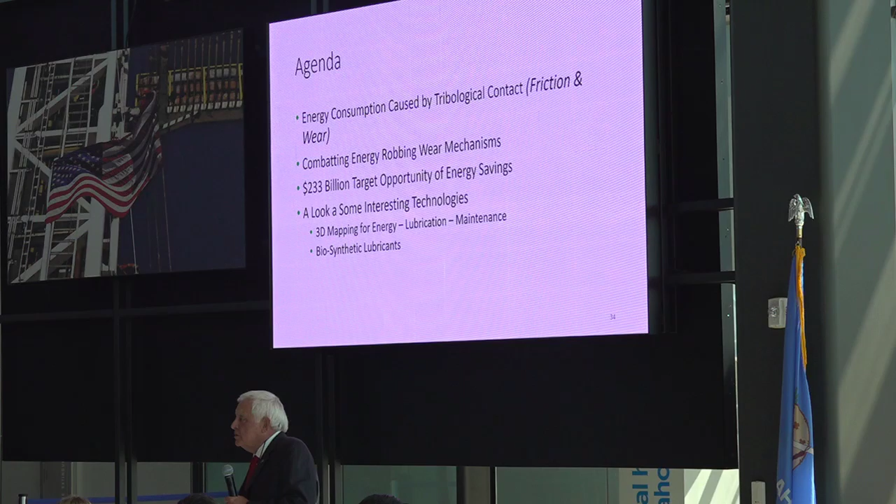The agenda: energy consumption caused by tribological contacts—that's the nerdy way of saying we've got a lot of friction and wear out there. We'll be looking at combating energy-robbing wear mechanisms with a very simplistic approach since it's only about 20 minutes. Then I'm going to talk about a $233 billion target of opportunity for energy savings—maybe one of the reasons why we're here. Then I'm going to talk about some interesting technologies that are coming around, including 3D mapping of facilities for energy audits, lubrication and maintenance programs, and maybe some biosynthetic fluids replacing petroleum products with synthetic bio-based fuels.

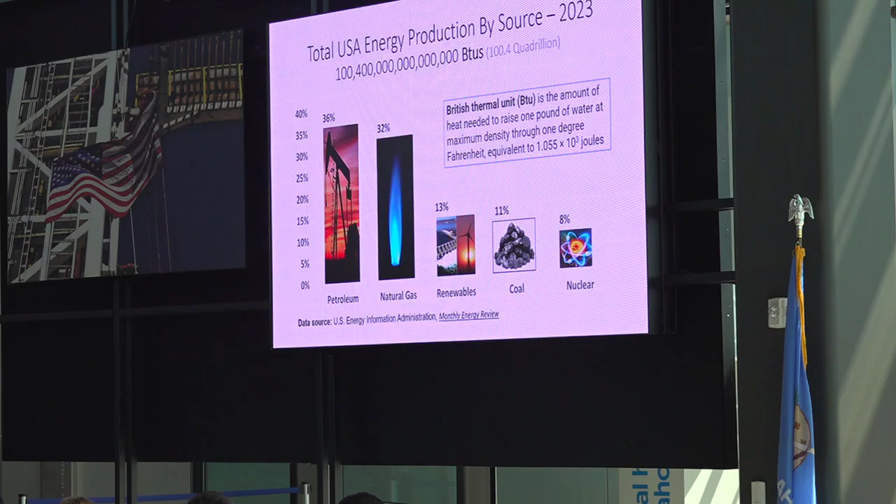So last year we produced 100.4 quadrillion BTUs of energy in the United States—almost 20% of the world's energy. When I've traveled internationally, people always say, well, you're an American and you guys use up so much electricity and energy. But I also say, yes, I'm American, and we probably develop 50% of the patents worldwide. If we're going to develop 50% of the patents worldwide, we need to be using our energy more responsibly and show other people how to do the same thing.

So we get about 36% from petroleum, 32% from natural gas—that's not going to go away for a long time. About 13% renewables, 11% coal, and probably a really black mark on this country is we're only producing about 8% with nuclear. The Three Mile Island movie is probably to blame for that.

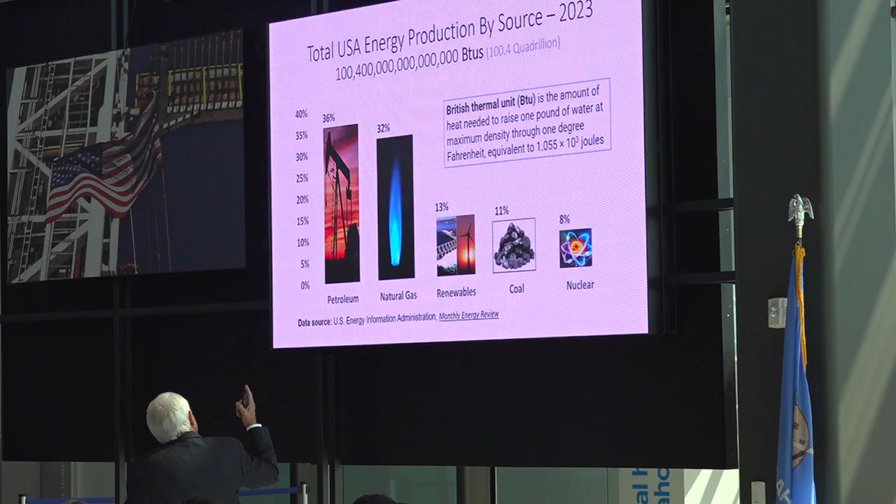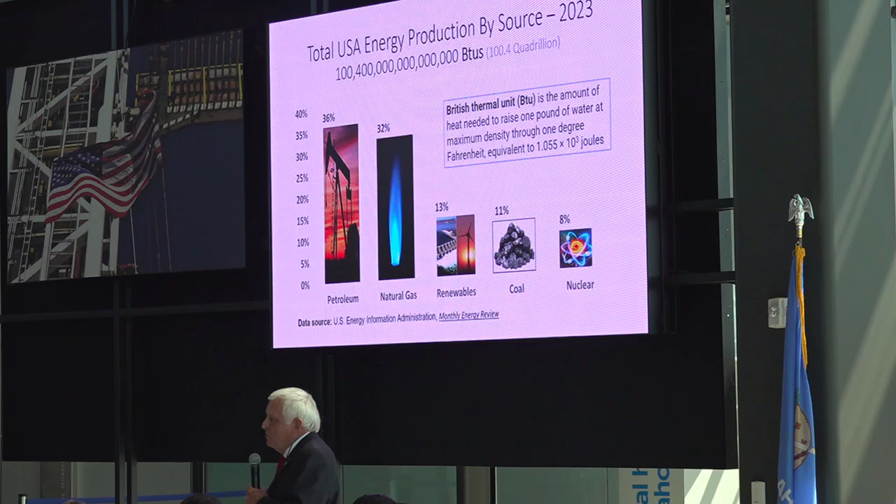If anyone knows what a British thermal unit is, it's the amount of energy to increase 1 pound of water by 1 degree Fahrenheit. If we took all of the energy we produced last year and used it to heat the Great Lakes, we could raise it 1.5 degrees Fahrenheit. So that's a lot of energy. A lot of energy.

So for transportation, about 1% comes from nuclear—that would be the nuclear aircraft carriers and submarines in our naval forces. About 5% from renewables, 4% from natural gas, and 90% from petroleum. That's a big number that we have to deal with.

If we want to replace that by 2030, it's going to be a big pull.

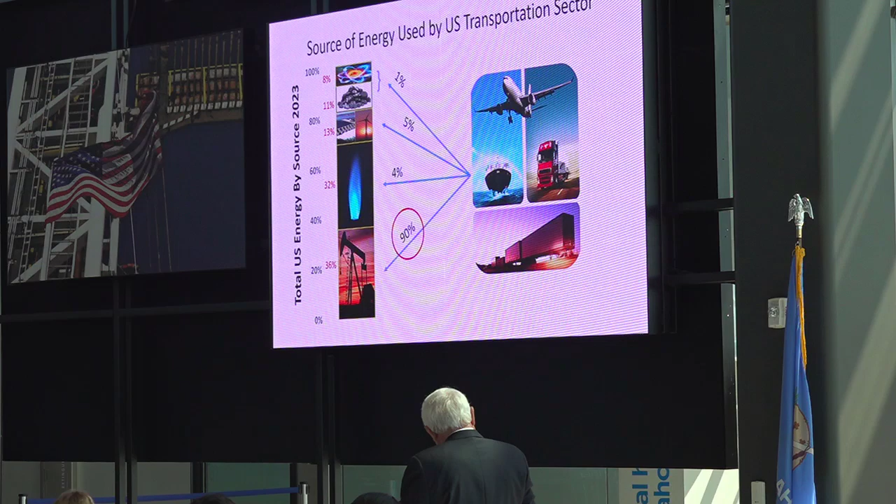Sources used by industry, which is what we're going to be focusing on: we're getting about 4% from coal and nuke, about 9% from renewables, 40% from gas, 34% from petroleum, and 13% from electricity. And that really surprised me.

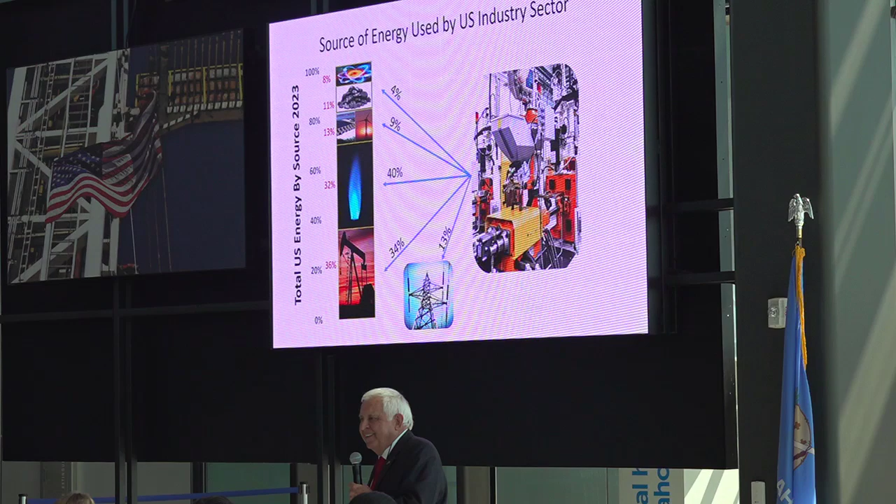That industry only uses about 13% of electricity, but when you realize all of the thermal energy that's required to make steel, okay, to use heat transfer systems for liquid blending and things like that, then it really starts to

make sense. So these are big numbers, but we really need to understand to get our hands around the problem. If you don't know how big the problem is, it's kind of hard to solve it.

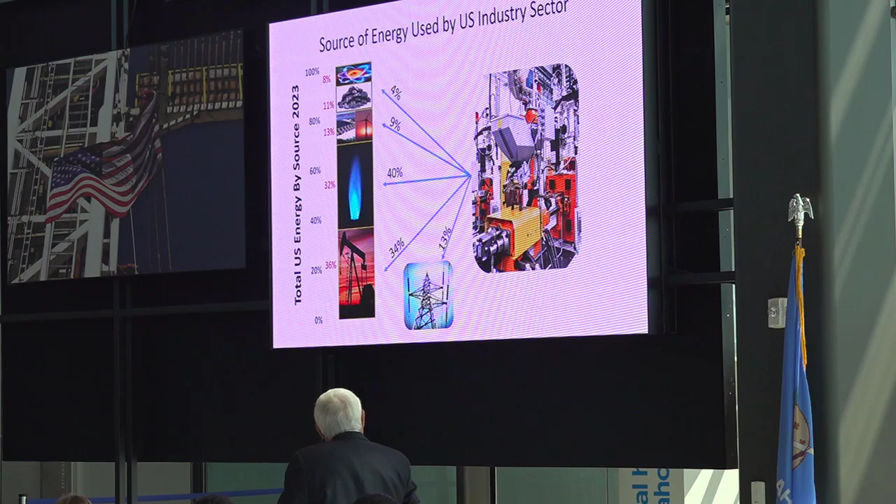Now we take a look at electricity, which we all want to save. We produced 36.7 quads BTU of electrical power last year, but only 12.9 quads got to the end user. We lost 65% in transmission.

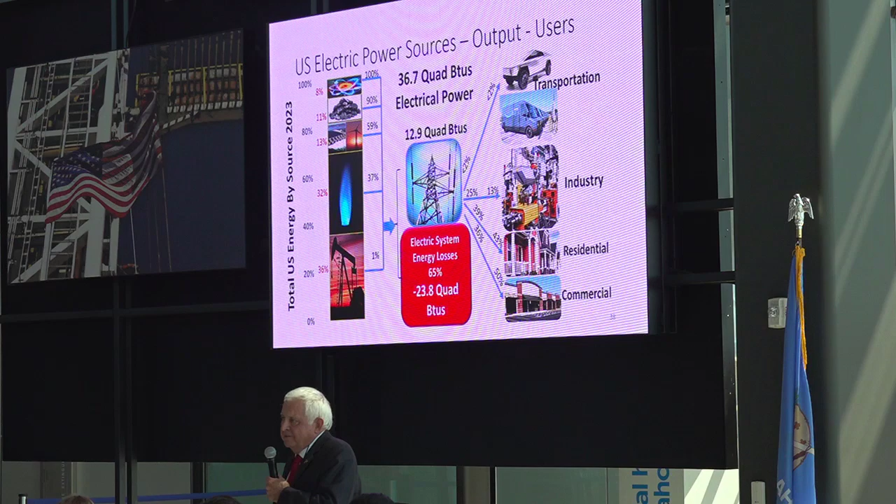Now, most people think that electricity flows down the wire like water does a hose. No, that's not the way it goes. It's the excitation of electrons from one to the other, and as that distance goes, that excitation reduces, and so you lose power.

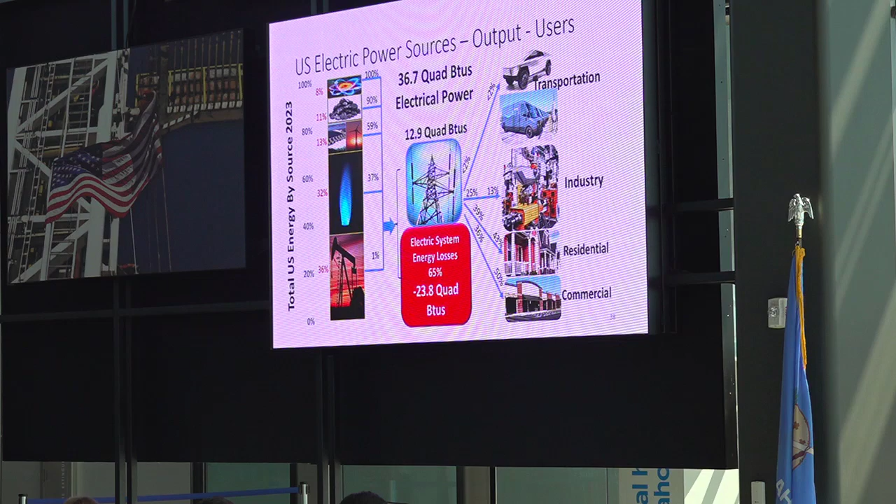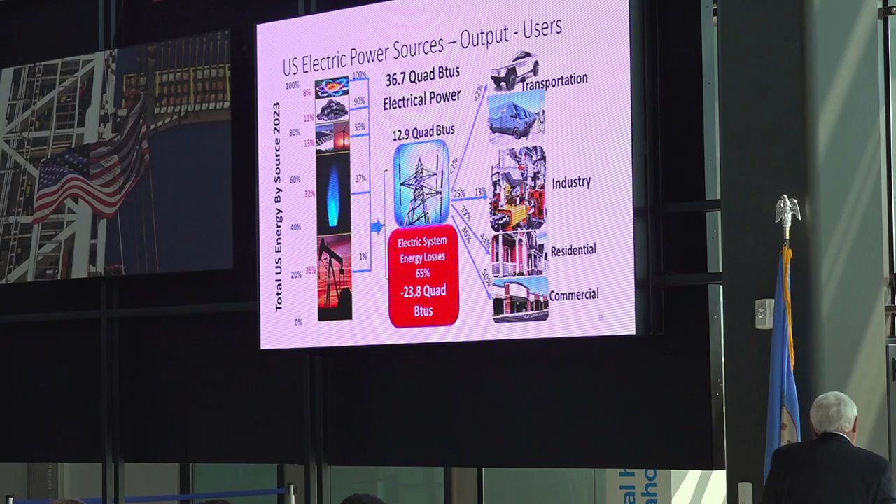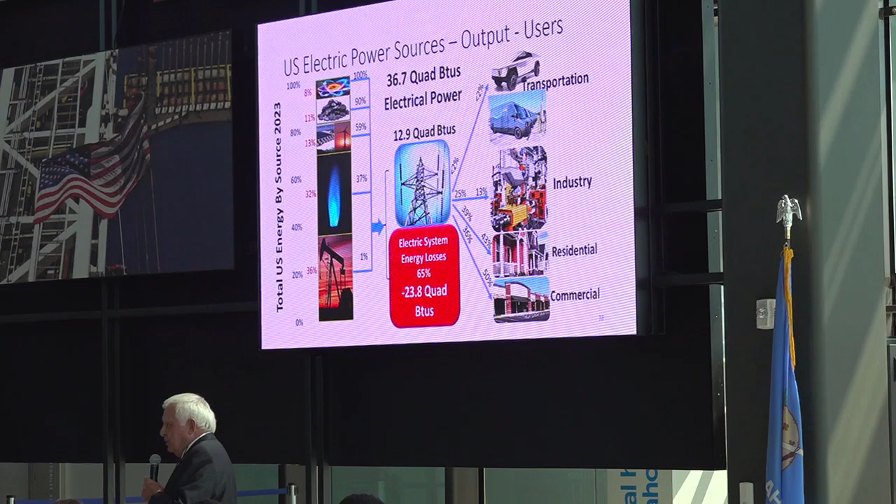If you're not a physicist, you know that that's pretty cold. That's equivalent to minus 220 degrees Fahrenheit. It might be really good for manufacturing on the far side of the moon, but not here. Not here. We still have a ways to go.

So where are we going to be using electricity? How much electricity is AI going to require? About 114 trillion watts.

Okay, so if we can't send it long distances, I think what we're going to have to do is the AI people, they're going to have what we call microgrids. They're going to have to establish their own microgrid, maybe a small new power plant, in order to provide the electrical energy needed for AI, because we certainly can't support it right now.

So we look around and say, what's this guy talking about? Microgrids and small nuclear power plants, isn't that stuff dangerous? Well, if we took all of the high-level nuclear waste, it wouldn't even fill this auditorium up to the first window. But it's really bad stuff.

Looking at a microscopic level, probably the next Nobel Prize in physics is going to be given to someone who's working on the transmutation of nuclear waste, turning it into isotopes that have a half-life not of 250,000 years or 5 million years, but maybe 50 years, so that we can actually handle it as a civilization.

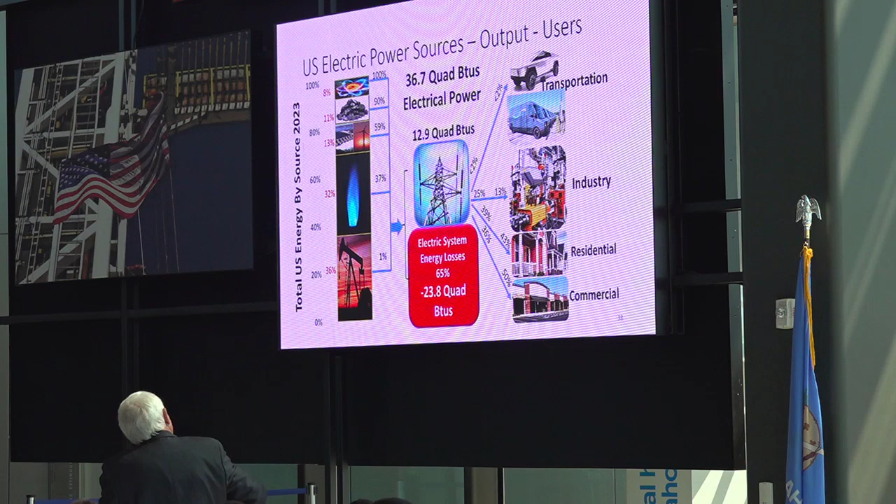So we take a look at how electricity is used: only about 2% now in transportation, 13%, 25% going to industry, 39% going to residential, and 36% going to commercial.

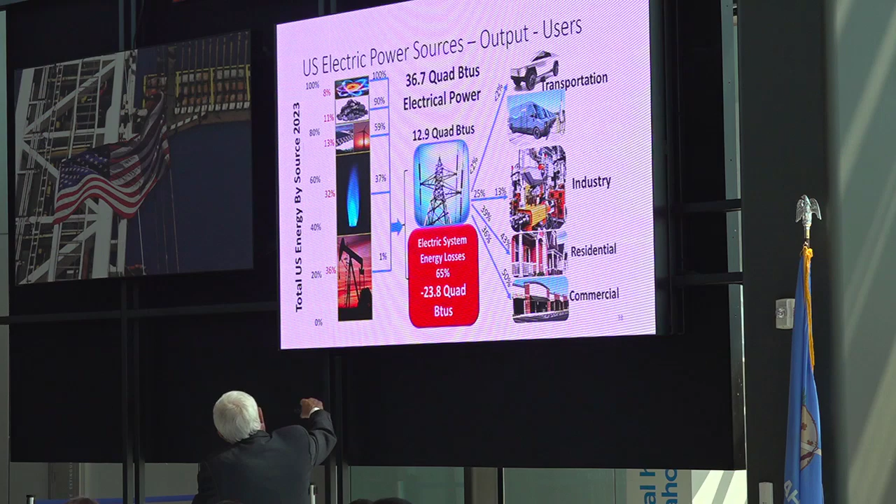And of course, this leads us to retrofitting buildings and things like that to save energy. But even if we could save that by 50%, we'd still only be saving maybe 5 or 6 quads of electricity.

This is a huge number. The world energy consumption caused by friction is more than what the United States produced last year.

I want to say it again: world energy consumption caused by friction was more than the energy that the United States produced last year — 101.3 quads.

So you know where this is going. I want to reduce friction, because this really could be low-hanging fruit.

So what is this friction and wear? Who's the tribologist in here? Yeah, I brought my own tribologist so he could raise his hand. Who's in physics? Chemistry? Okay, little lesson.

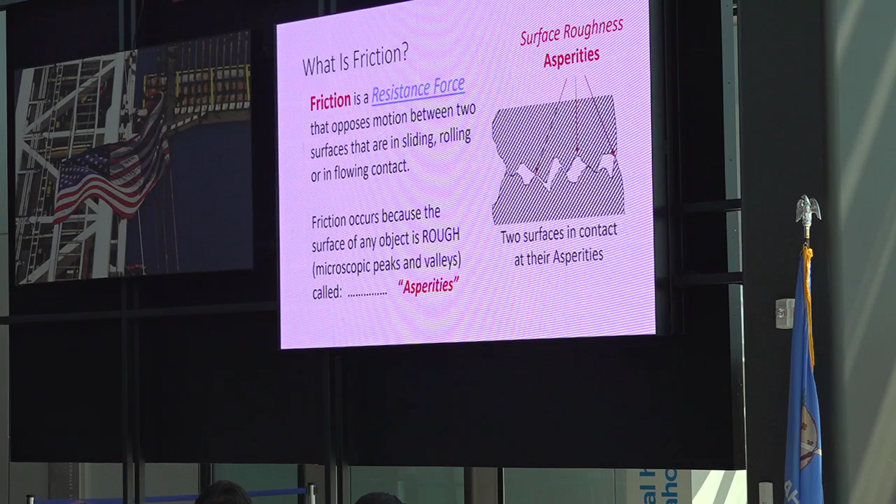Even under magnification, if I take a look at a very shiny ball bearing and I magnify it enough, I can see that that surface, although it reflects light, what shiny does is extremely rough. This is small enough where you can actually see the carbon in the carbon steel matrix there.

65% of equipment failure is attributed to wear. We're talking about people, profit, planet. If we can reduce wear, that seems to really improve their profitability. Things won't wear out as quickly. Things will last longer.

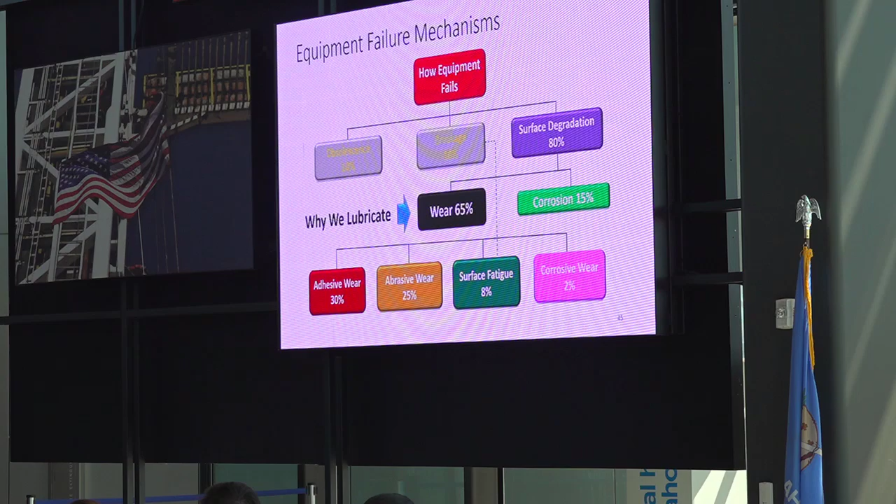So how does equipment fail? About 10% is obsolescence. So if you're the owner of a coal-fired power plant, your equipment is failed by obsolescence, as you have a dirty source of energy. Then there's breakage. Who hasn't broken glass? To me, breakage, I immediately think of a forklift driver, right, Penny? In manufacturing plants, they break everything.

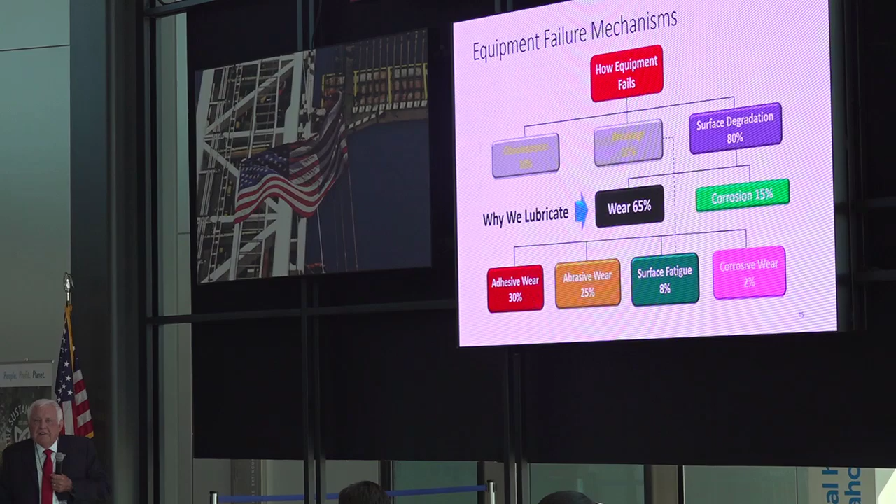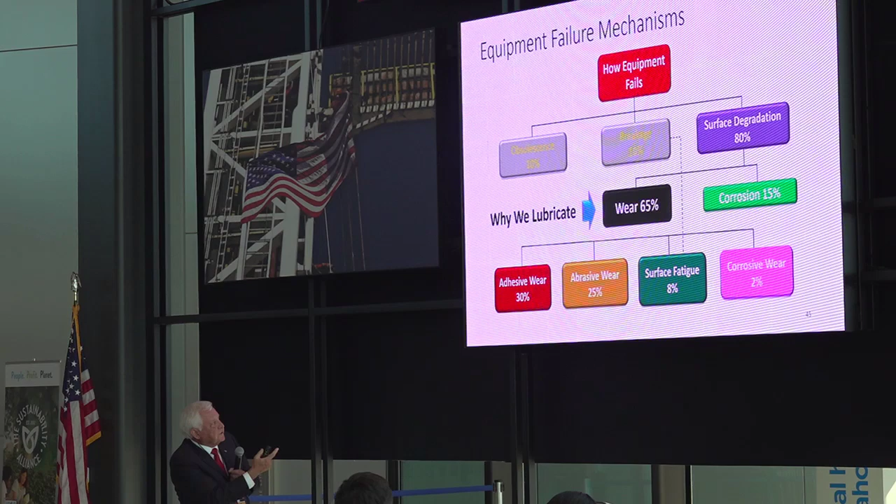They beep just before they break something. Okay, and then 80% of surface degradation, 15% of that is called corrosion. That's why we paint and use correct protective coatings. And 65% is wear related: 30% adhesive wear, 25% abrasive wear, 8% surface fatigue, 2% corrosive wear.

All of these wear types, there's only 4, but we call them by a lot of different names. This is what happens with adhesive wear: typically we just have 2 metal surfaces coming in contact at the asperities because we've used the wrong lubricant.

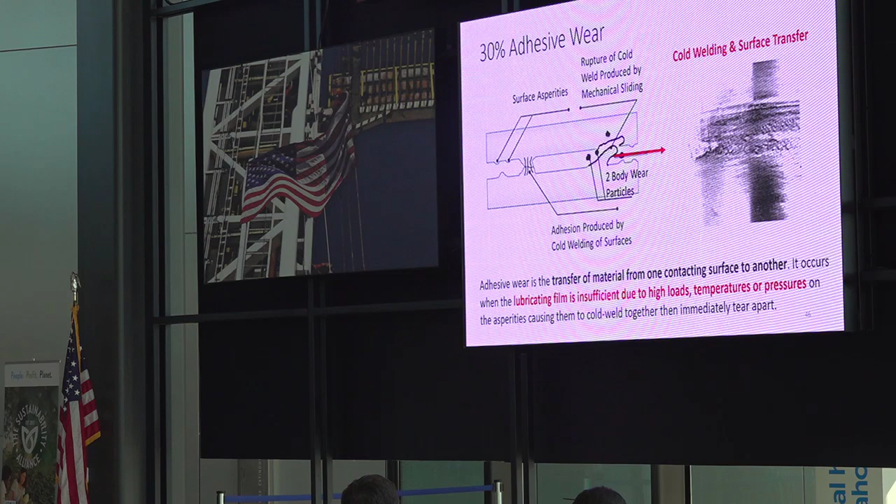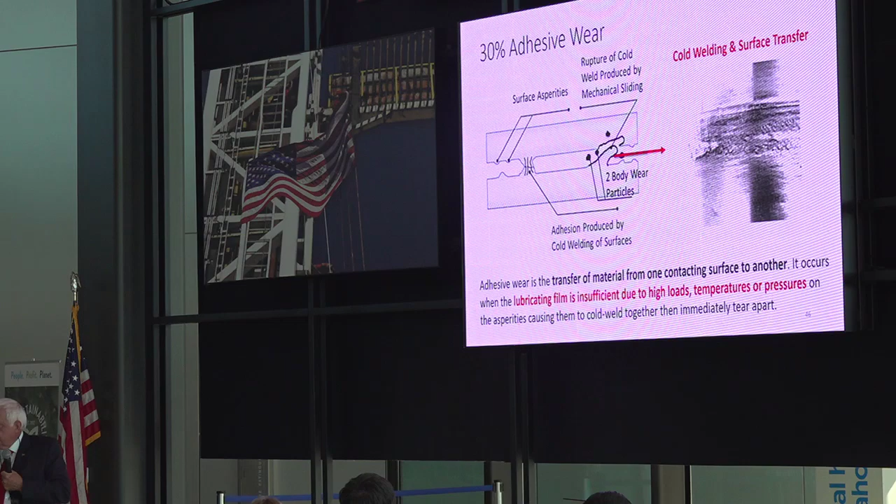Lubricants are not just slippery and wet. They have to be designed. So what we have is the lubricating film is insufficient, either due to high loads, high temperatures, or high pressures. Metal surfaces come in contact, they cold weld, transfer material. We call it scoring, galling, seizing, smearing, and scuffing. Those are the typical terms that a layman would use to describe it.

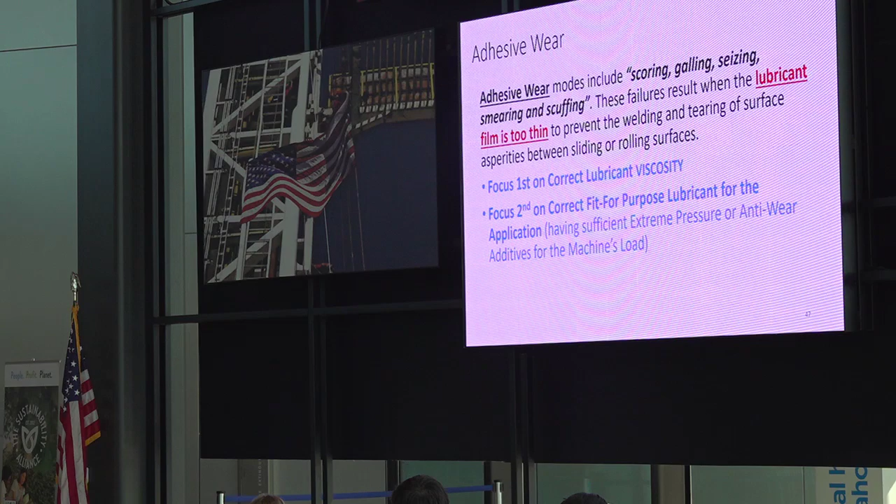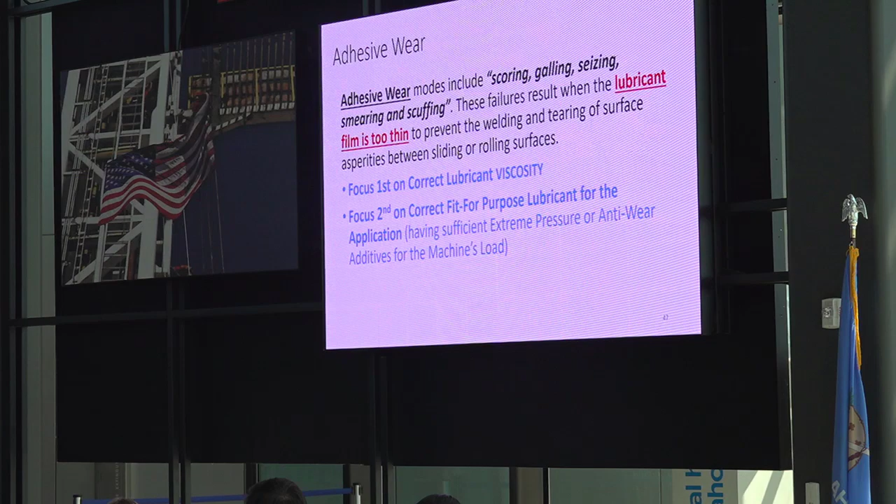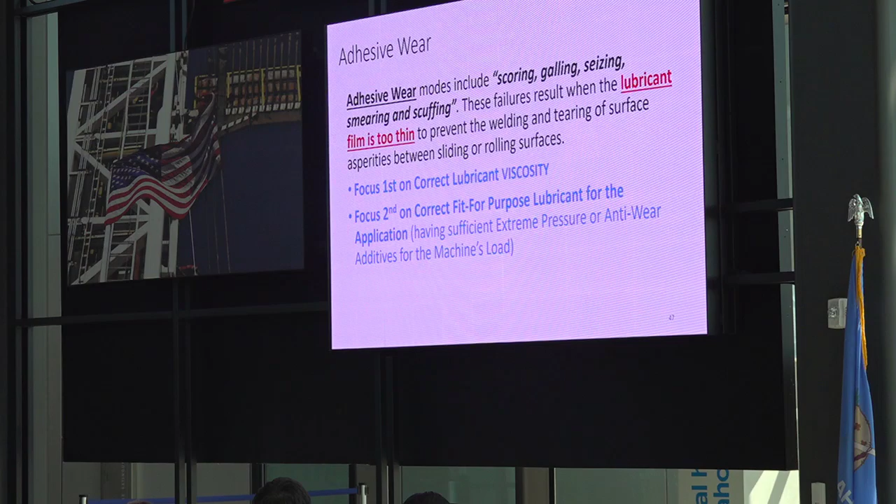So my first focus when I see this type of wear is: is it the correct lubricant viscosity? Which is simple enough. The next one would be, does it have the correct fit-for-purpose additive package? I come from almost 20 years of developing and selling additives for a company called Lubrizol, which is the world's largest. So that's what I would first look at.

Very first law of lubrication, and what is that, Professor? Viscosity. How many times did I use the term viscosity in the three-day training courses I gave? About 100 times, just to beat it into people. It's the most important physical property of a lubricant, especially if you want to prevent adhesive wear. You've got to keep the metal surfaces separated.

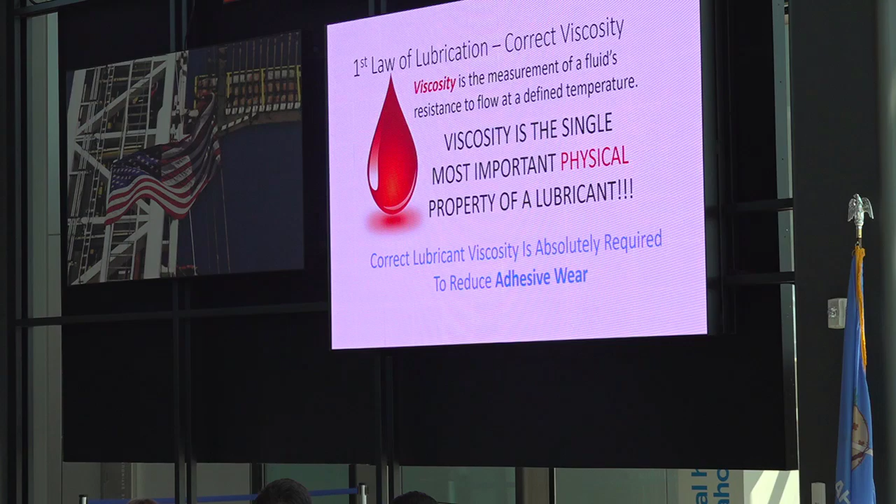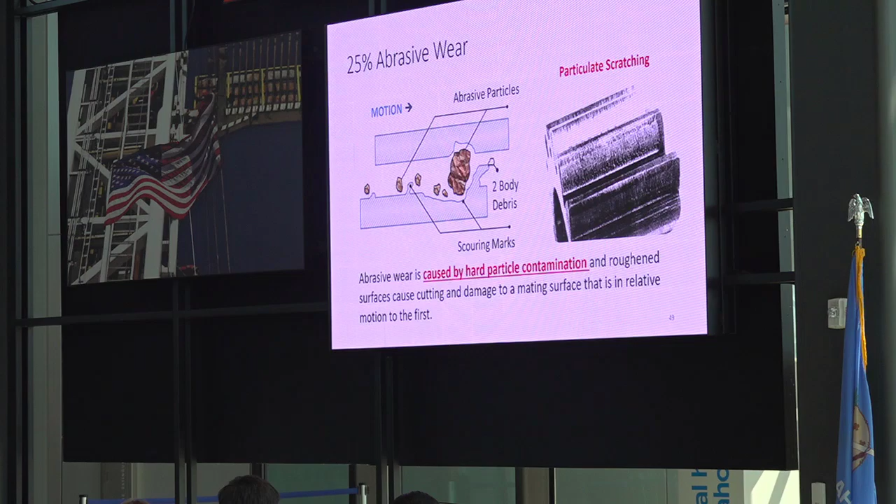Then we have abrasive wear. Oh, by the way, adhesive wear generates wear particles - we call that two-body wear. And then we have outside particles that cause three-body wear, caused by hard particle contamination getting between the moving surfaces. We call it polishing, scoring, scratching, grinding, gouging, and erosion.

So if your lubricant is contaminated, well, this is not fit for purpose. It's going to cause more friction and wear. So my first focus is always lubricant cleanliness, preventing contamination, which is about 10 times less expensive than controlling contamination.

So the second law of lubrication is cleanliness. So here, courtesy of Michelangelo, is God giving man an oil filter. And the devil got involved in reversing filters to make them last longer - that we were talking about earlier today.

Then we have fatigue wear. Fatigue wear typically happens over many cycles. It's sort of like bending a coat hanger - you bend it enough times, it breaks. Or if you bend the coat hanger an extremely large amount, then it breaks because of the forces generated.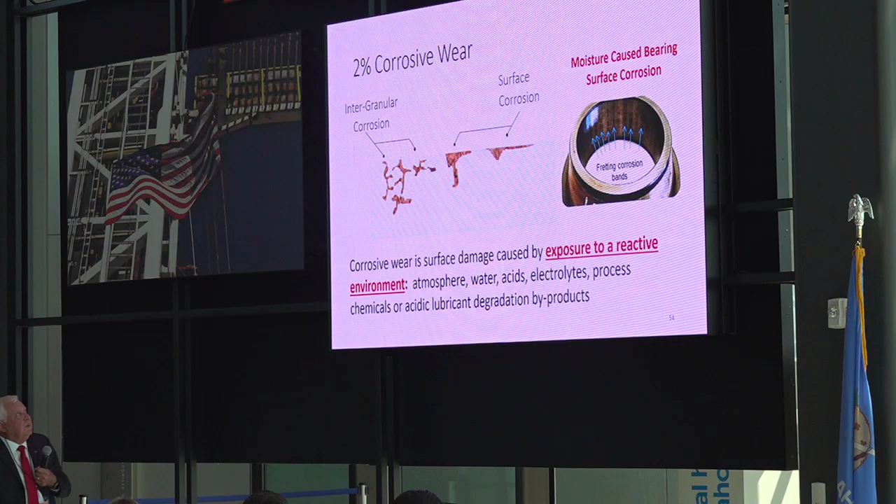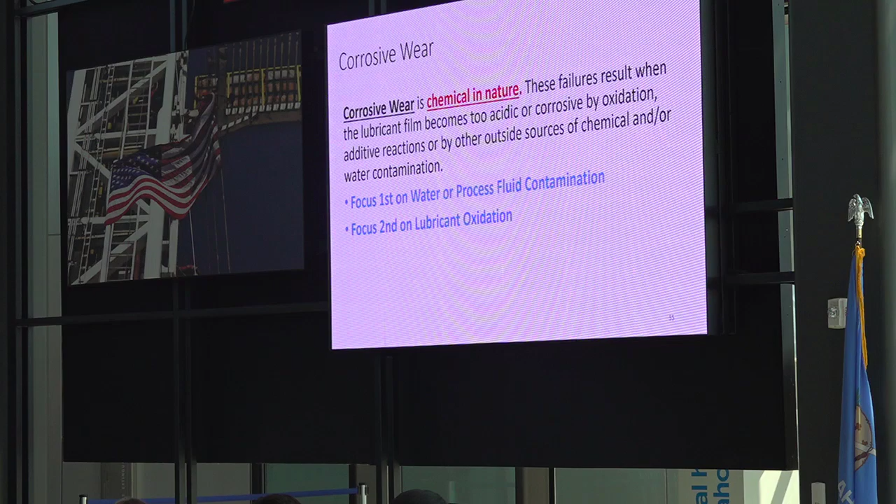And then finally, corrosion. It could be surface or intergranular below the surface, from exposure to a reactive environment, whatever that may be. Typically, the reactive environment is water. Things rust. We get fretting lines caused by moisture getting in between surfaces. Then there are process fluids - things we pump in refineries and chemical plants - which is why we have mechanical seals to keep process fluid away from our bearings. My second focus is lubricant oxidation, because when we forget to change our oil, it undergoes a chemical process called oxidation or nitration, since the air we breathe is about 78% nitrogen, 21% oxygen.

So focus on that, because that makes your oil acidic enough to corrode the surface. All we have to do is control for easily identifiable and recognizable types of wear. It's as simple as that. We've been trying to do it for 4,000 years.

What's the true cost of lubrication in our country? Total U.S. automotive and industrial lubricants in 2023 was valued at only $26.8 billion, and it's expected to grow to about $37.5 billion by 2033. So we spent almost $27 billion on industrial and automotive lubricants in this country last year.

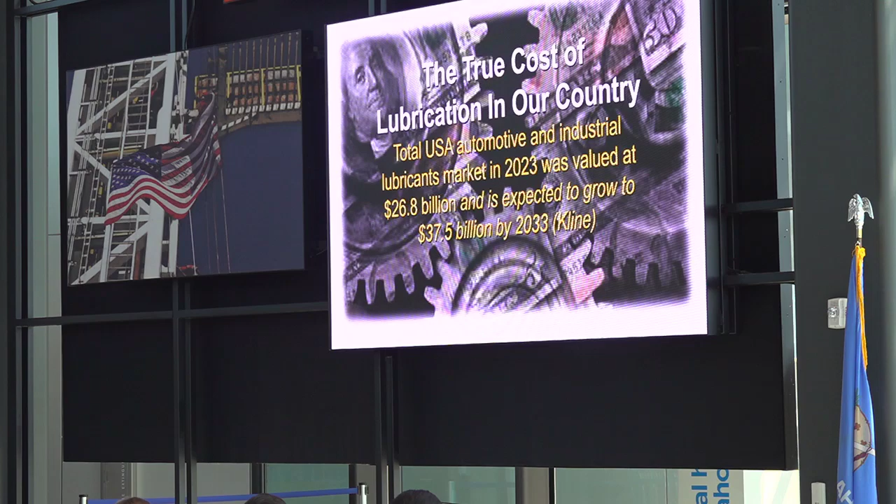Now, we talked about the energy. Now let's talk dollars. How much money did friction and wear cost us? According to the Energy Information Administration, the direct cost of friction and wear accounts for about 8.31% of our gross national product. Last year we had a gross national product of about $28 trillion. So last year, friction and wear cost us $2,336 billion.

That's so good. I get goosebumps thinking about the money that we just throw away. We haven't got it right in 4,000 years. Right, Kenny? We still haven't got it right.

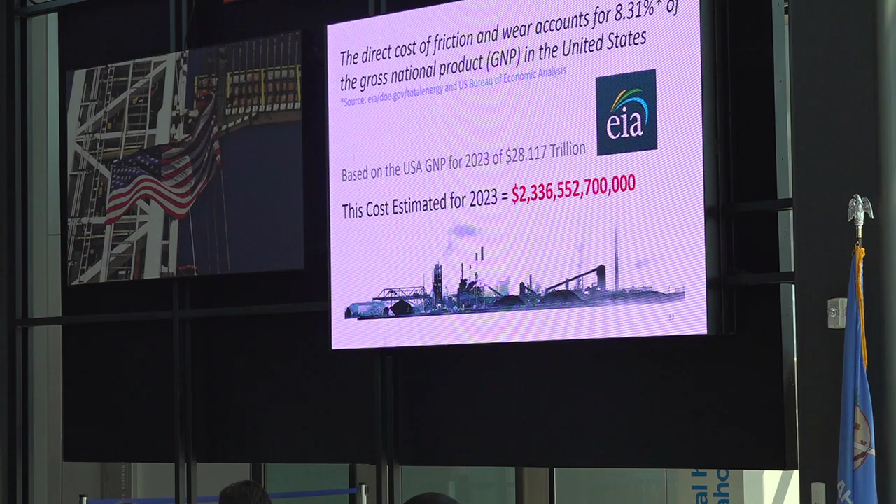Then we go to an organization I belong to, the Society of Tribologists and Lubrication Engineers, and they said 10% of that friction and wear cost could be eliminated by simply using the correct lubricant. That's where my training comes in. This is what I focus on. This is my passion - for people to use the correct lubricant for the application.

And that is $233 billion in potential savings just by doing something right, which is 9 times more than what we actually pay for the lubricants. That's also an amazing number.

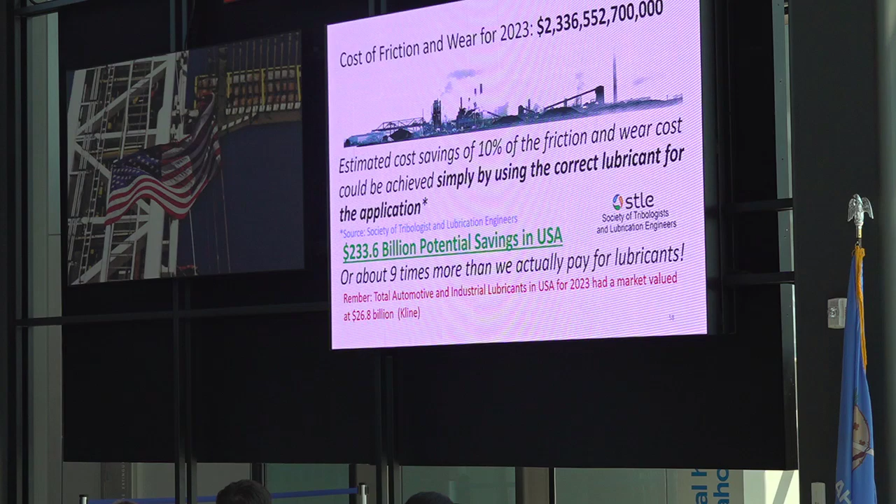So I think one of the great opportunities the Great Plains Center of Excellence has in doing energy audits is also maybe helping to conduct lubrication audits with proper training. And I'm here to help you. So that's our potential across the country. I'll take 13 states worth of that, won't you? You think that'll be a good return on investment for the Department? Who's the owner? Department of Energy, right?

Did you know all these numbers? No? You know why? Because they don't come with pictures. It's the most boring report I get on a monthly basis, so I have to put them in picture format so people can understand. Nobody knows what a quadrillion is. That's a big number - 15 zeros. And you talk about a kilowatt hour, that's minuscule compared to that.

So that's our potential savings. That's why I'm excited to be here. That's why I'm passionate.

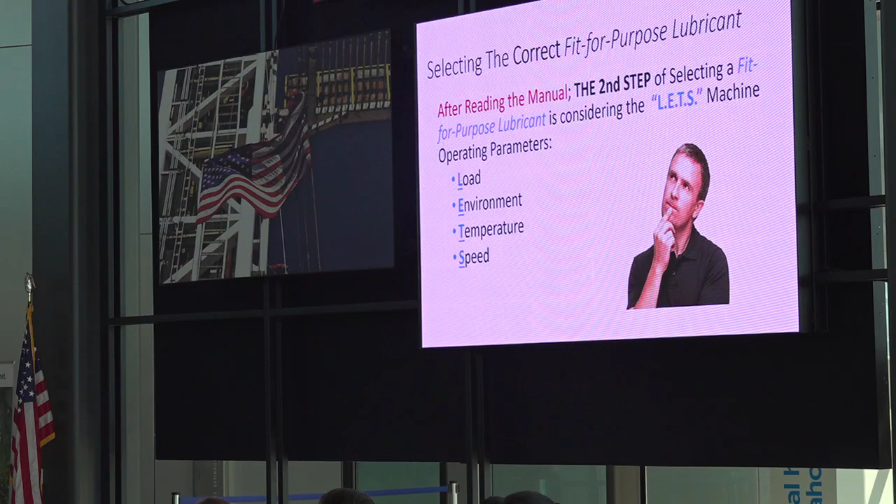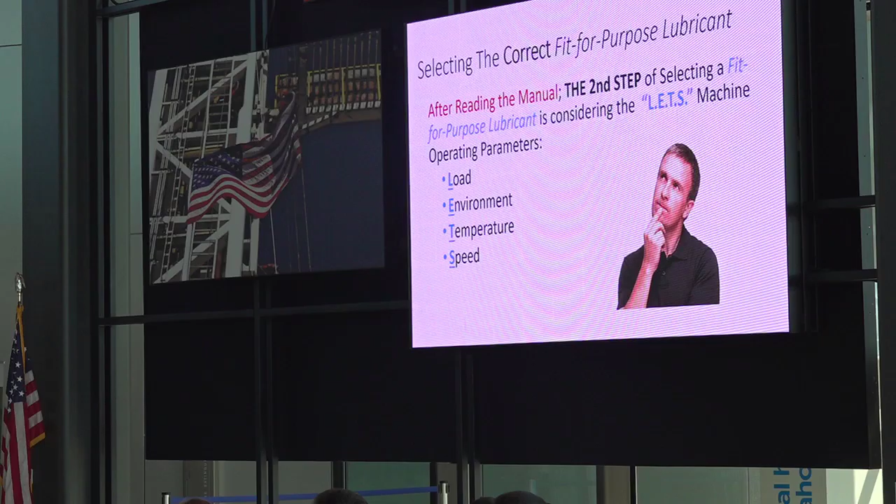We're gonna tinker with our toys and our equipment. I've had engineers send me parts, and they say, well, this is what happened when we installed a 150 horsepower motor on this mixer, and we replaced 100 horsepower because we thought we could mix it just faster.

And of course, the gears all chewed out and everything because we tinkered and we broke. We didn't take into consideration 4 critical machine parameters, which I call load, environment, temperature, and speed. I try to keep everything simple. I teach professors, and I teach lube technicians with a high school diploma, or maybe not even a high school diploma, this technology. And they go back and they make a difference.

So if we're talking about load, we've got static loads, dynamic loads, and shock loads. Now, if you happen to be purchasing electricity in a manufacturing plant, you're paying for peak load, because that's what the utility needs to build for. After the peak loading, you get into your dynamic load or your steady state load. That's just maintaining momentum. And then you have your shock loads causing severe stress. That's when you break things.

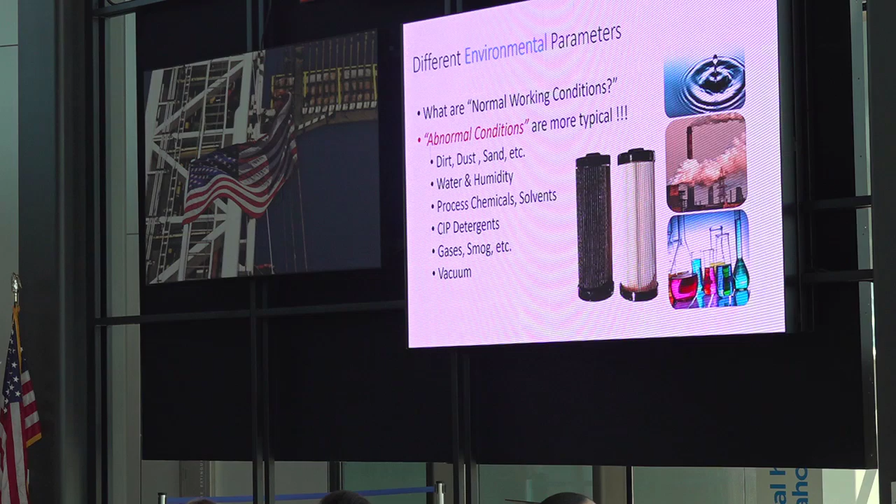Unfortunately, they're all PFAS. So by the time we colonize Mars, we'll send them on a rocket ship that's lubricated with fluorinated lubricants, and we'll all have mutants living on Mars. We haven't figured that one out either.

Different temperatures: ultra low temperature, anything less than minus 40 degrees for a hydrocarbon lubricant. Normal low temperature, less than 40. Your normal operating temperature, more than 40, but less than 200. And then high temperatures, and then extreme high temperatures. For a hydrocarbon, extreme high temperatures above 400 degrees Fahrenheit, those liquids don't last very long, they have to be lubricated.

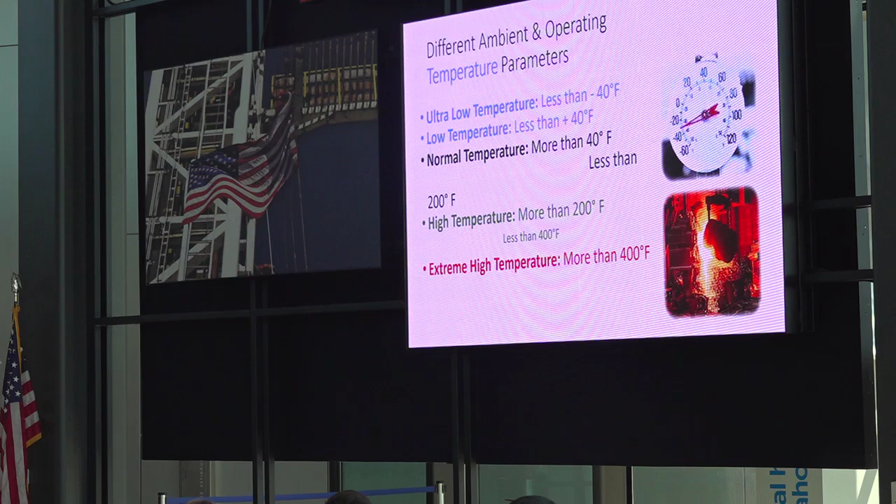Then we have different speeds. For years we were only talking about ultra low speed, medium speed, high speed. Your medium speed is where your electric motors are. Your high speed is probably where your teenagers drive their cars or drive a motorcycle. Ultra high speed greater than 10, and then now I call it Tesla speed. Tesla speed has to be accounted for, greater than 20,000 RPM, because that's what the electric motor turns at, going through a 3-stage gearbox. So now we have what I call Tesla speed, greater than 20,000.

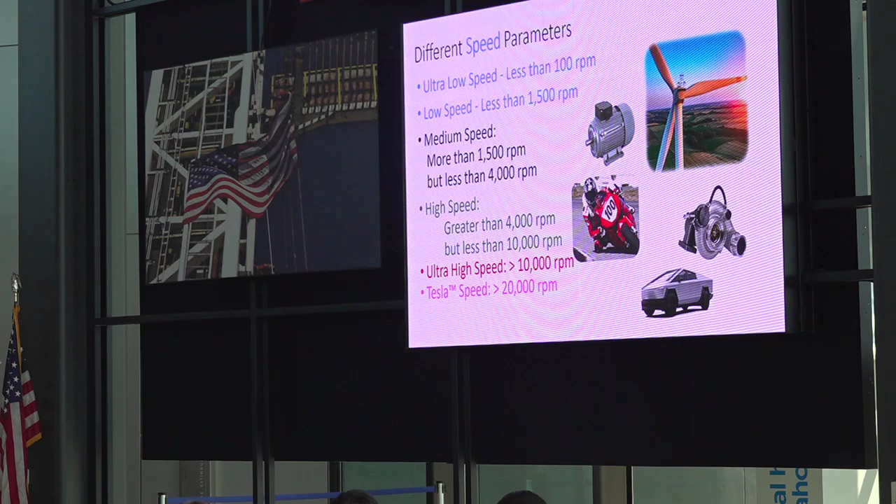Well, we have to take all of that into account. Why? Because load, environment, temperature, and speed directly impacts how things wear out. Bringing it all back into the circle, it's roundabout: we don't read the manual, we increase wear and friction. Because load, remember what I said? You double the load, bearing life is reduced exponentially.

Well, adhesive wear: load, speed, and temperature. If my oil isn't correct and it can't stand the operating temperature and thins out, guess what? Metal surfaces come in contact with each other. If my speed is too high and my viscosity is too high, then the oil can't get into the high-speed contact. If my load is too great and my oil is too thin, it gets squeezed out quickly.

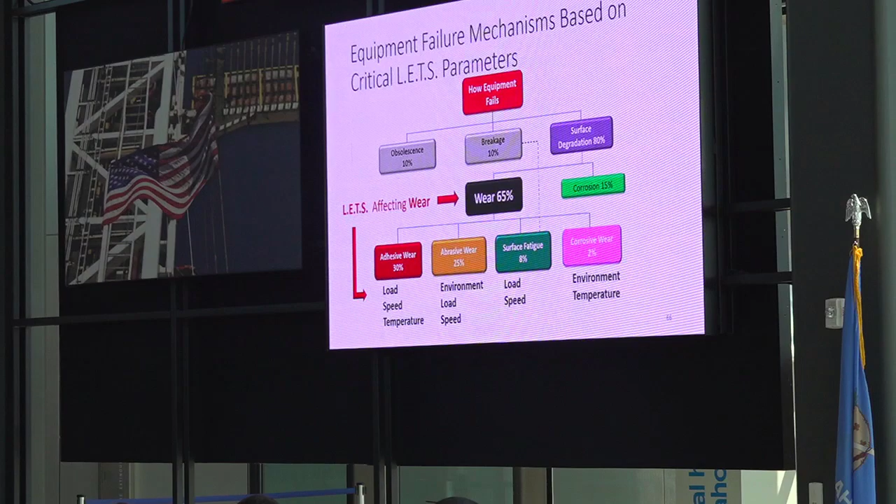My environment: all the dirt in our extremely dirty environment. If you read the newspaper—who reads the newspaper in the morning anymore? We get everything online, but in the old days, when I read the newspaper and I had a sunbeam coming through the library, I'd sit back and see all those little floaters. Those are dust particles, the ones that you can see. It's like they say, it's what you don't see that can hurt you.

And then, of course, load and speed, because load and speed is going to produce my adhesive wear particles that will also result in abrasive wear. And then my surface fatigue, load and speed, and my corrosive wear is going to be environment and temperature.

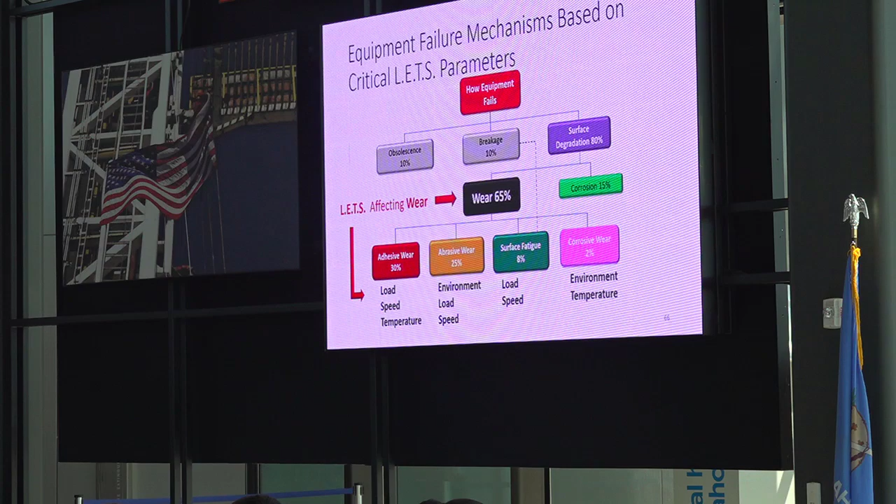That could be, yeah, well, that could also be in your corrosive wear. Yeah.

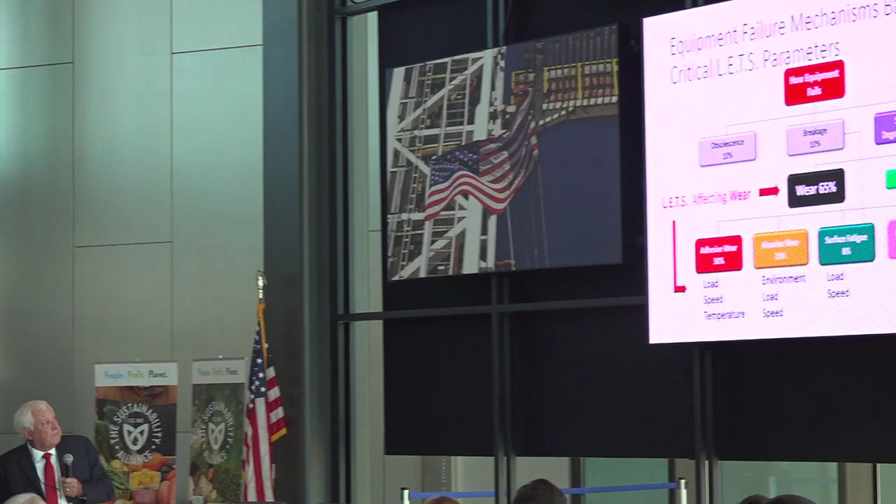So the relative size, this is always, cigarette smoke is 1 micron. Lots of refineries literally lubricate their bearings with a mist of oil.

During COVID, I was out in the backyard smoking a great Cuban cigar, and my wife and her friends were playing outside with masks on, canasta. One of the neighbors said, 'Oh John, zero lot line,' so the smoke had to go all the way over her house into her side. She said, 'Oh, that cigar smells great, is it Cuban?' I said, 'Yes, it's a Cuban. And if it were a virus, you would all be dead now.' Because you can smell it through your mask and it's only 1 micron. And the COVID virus is 80 nanometers.

So why do I focus on the small stuff? Because we lubricate with extremely thin films. A journal or a sleeve bearing about 5 to 100 microns. We get down to rolling element bearings, 1/10 to 1/2 of a micron. We're looking at nanoscale thicknesses of lubricating fluids. So guess what, we got to get it right.

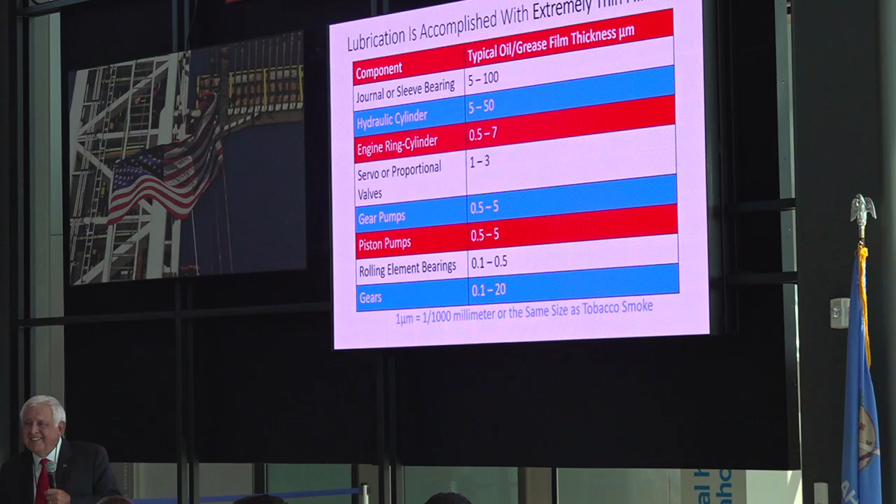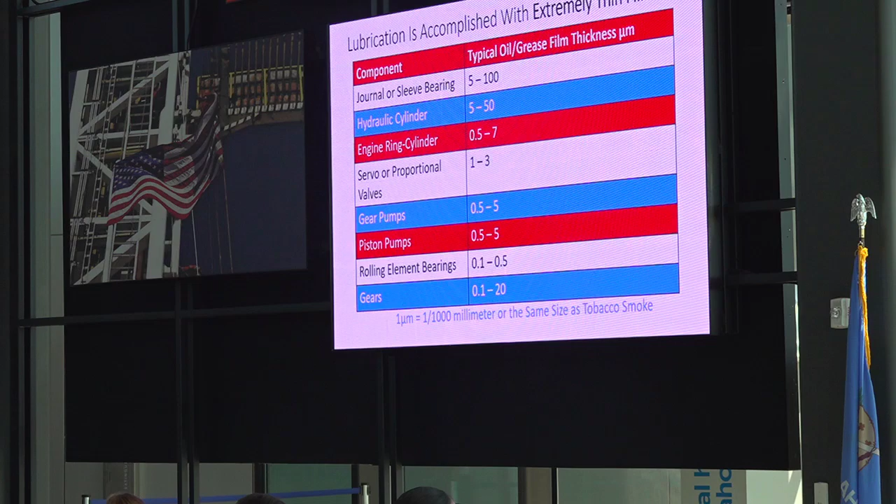When I worked for Lubrizol, every time the automotive industry came out with a new motor, they designed it, and then they came to the oil industry and said, hey, you guys have to improve your lubricant to protect my turbocharger, or to protect whatever, because the tolerances and the temperatures were all changed. So yes, in 1980 it was SF for passenger cars, then SG, SH, SJ, we're now SP. That many changes in 40 years because the engine technology changed, the oil technology changed with it. The only thing is, the oil technology only changed after the problem showed up.

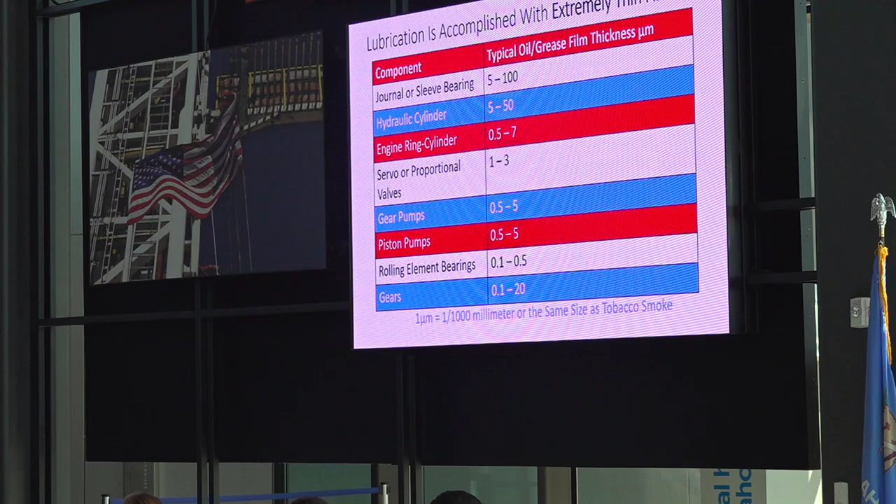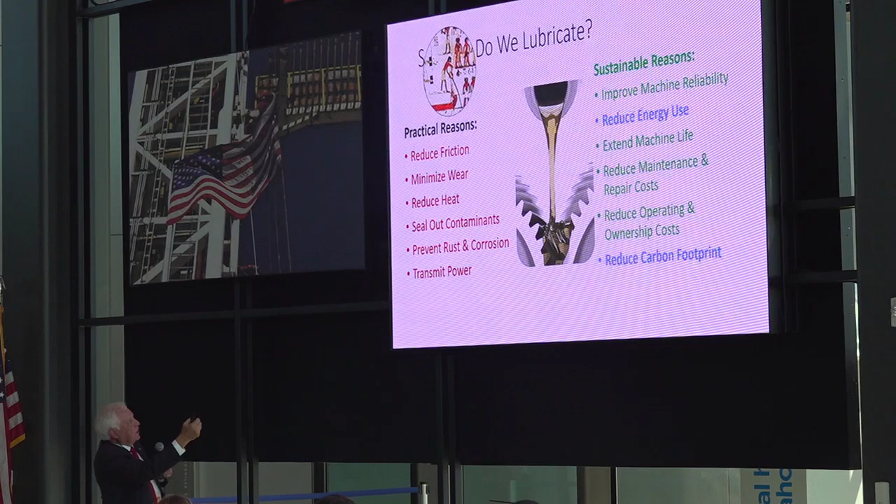Next is reduce energy. So if we finally get it right after 4,000 years, and we reduce friction and wear, we can also reduce our energy use at the tune of $233 billion in this country. Extend machine life, save on capital, reduce maintenance repairs, reduce operating costs, and finally, reduce our carbon footprint.

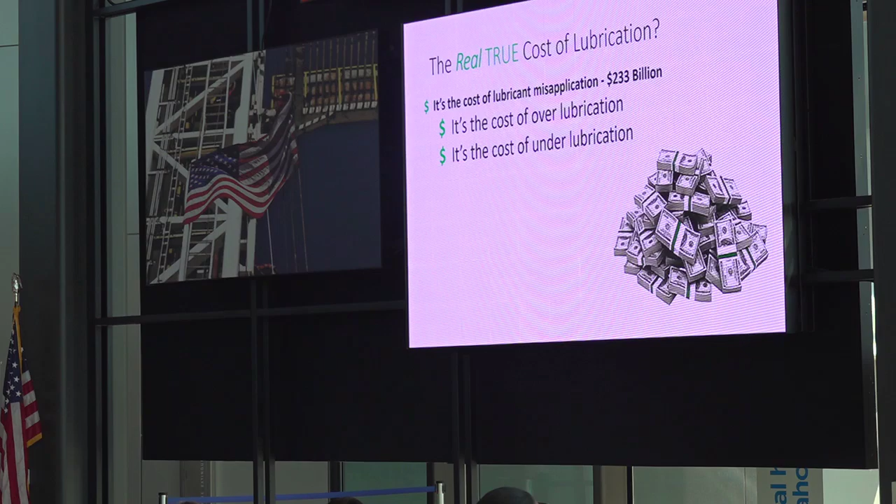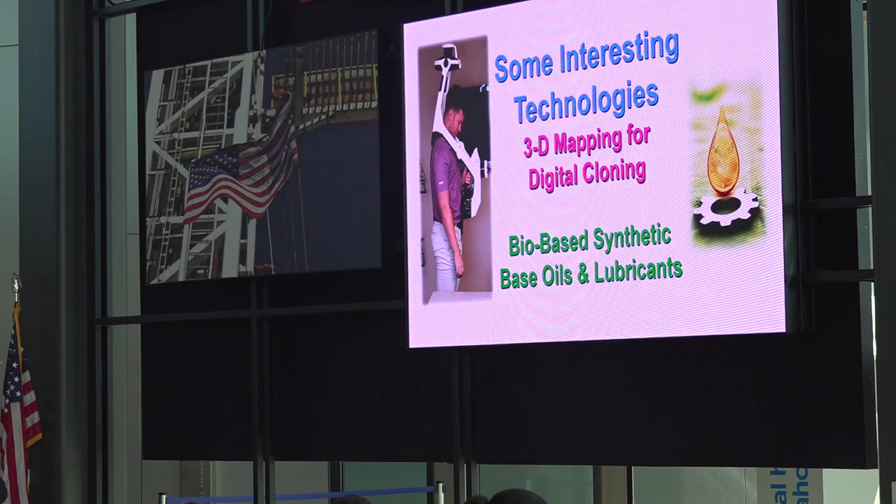So some interesting technologies that we're looking at, just like a Google car driving in your neighborhood taking a picture of the neighborhood. We'll also talk about some bio-based synthetic base oils that are coming into the market. This is the MapVest 3D mapping for digital cloning of a facility. This is to the scale now where one person can walk through a plant in about 30 minutes to an hour and get a digital map of the whole thing.

Now, why is this important? Well, it's pretty important for one of our companies. We have 51 plants, and we're going to digitally map all 51 plants. We're going to have a digital clone.

Two years ago, I was at Eli Lilly in Indianapolis, and they showed their digital clone of a facility in India making pharmaceuticals. A machine went down, and I was able to go into a room with the experts, put on my virtual reality glasses, and I could see the exact same machine in India. We had a digital clone that I was looking at.

So the technician could be walked through by the experts on fixing and repairing this machine in the least amount of time, because I'm sure that Eli Lilly facility was losing more than $150,000 an hour.

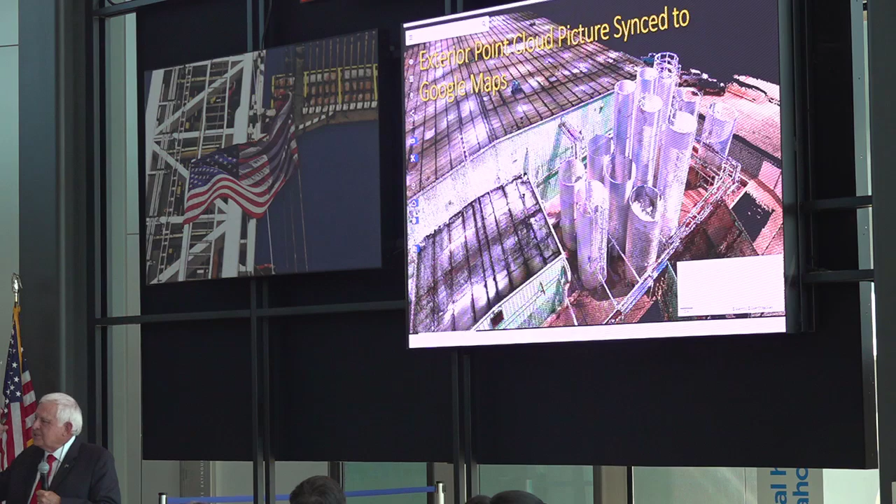What's this? So this is an exterior point cloud. He was not in the hot air balloon - this is what's so neat. He was not in a hot air balloon to do this photograph. He walked through the plant, but he got the coordinates from Google Maps.

So we can look through here. This is a Google map of my facility in Tulsa. It's almost like looking down through a glass and looking at my facility.

And we can use this point cloud for snippets to export into CAD/CAM, so that people can have drawings of their facility, as opposed to a schematic, which everyone has a different schematic that you're trying to look at for their process.

So this is actually looking through the roof of my facility, and this is one of our reactors. And then this is the point cloud picture in here, and you can remove people standing in the way.

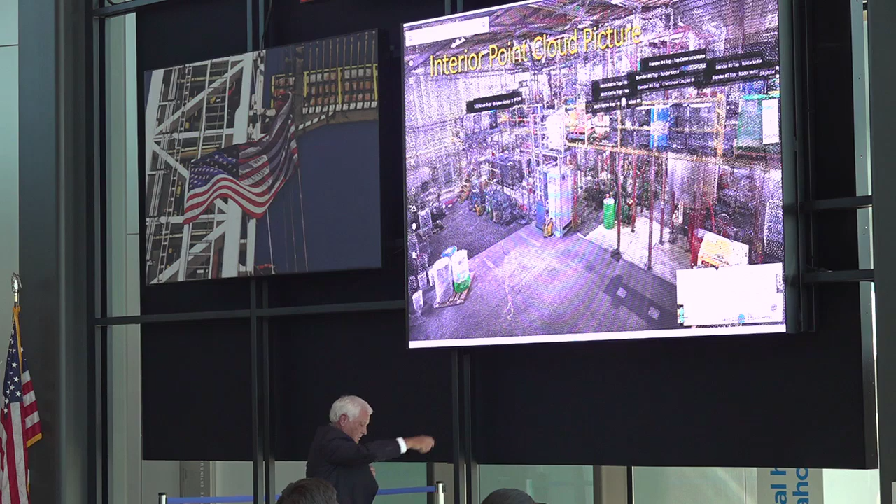You can eliminate them out of the picture, and then you can take that point cloud, turn it into a high-resolution panoramic photo, which is suitable for virtual reality.

And I'll be able to put on my virtual reality glasses and give Chris or the manufacturing guy help - yeah, well, I think you should do it this way. We'll put the non-experts behind the glasses, because that could be a liability otherwise.

But now you can document points of interest - motors, pumps, bearings, even lubrication points - and that can all go into a computerized maintenance management system.

So this is the hardware. I really wanted to show you some of this. You need a really good computer - it's not your normal laptop that you can manipulate this data with. So this is what you need to manipulate the data. But it does support two computer maintenance management systems right now.

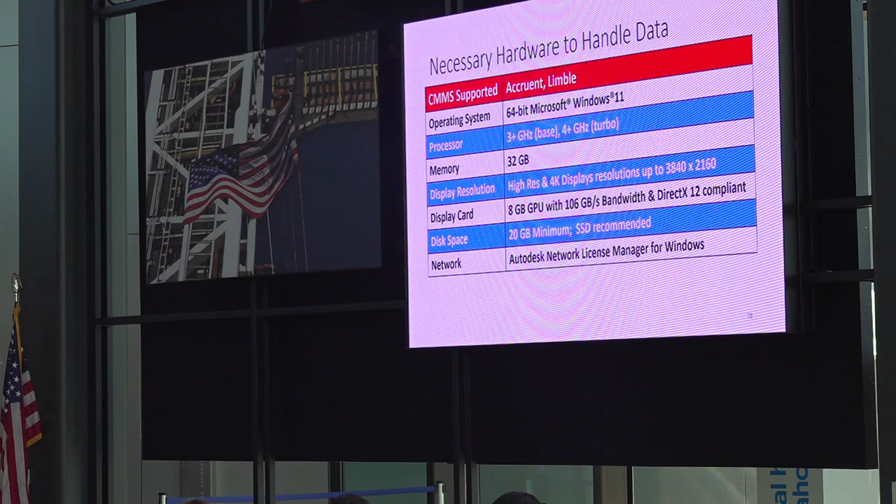Any questions on that? It's a really neat technology. You've got a grad student who's getting involved in this - he needs to talk to Kenny and a couple of people.

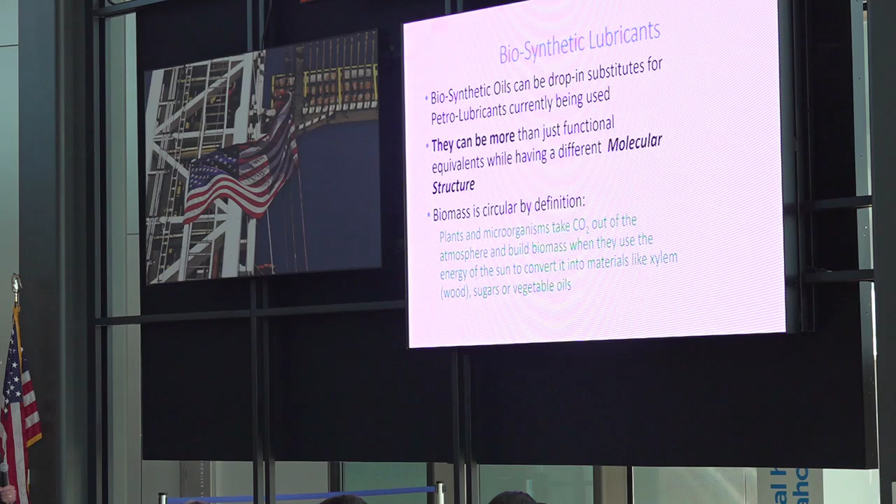Now I want to talk to you about biosynthetic lubricants. Biosynthetic oils can be drop-in substitutes for petroleum-based oils. They just have a different molecular structure. And biomass is circular by definition.

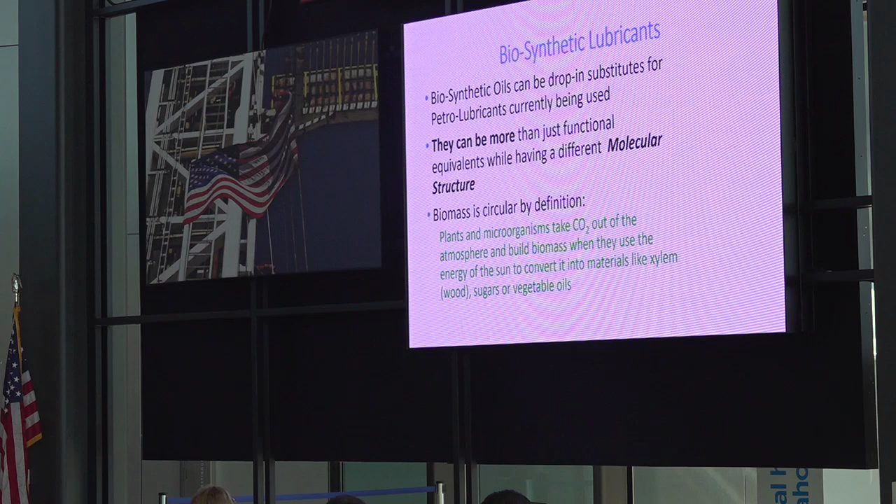I love this. Plants and microorganisms take in CO2, use the sunlight, and build biomass - either lignin, xylem, wood, sugars, or vegetable oils. So it's a circular process, something that we've been looking for a long time.

The Stone Age did not end because we ran out of stone. That was 4.5 million years - that's how long the Stone Age lasted, and you'd run out of stones after that. I think the Bronze Age was like 2,000 years, the Iron Age was like 800 years, and the Steam Age was only less than 250 years.

And now the Petroleum Age started in 1907. So how long will that last? We don't know, but we do know it can be used for lubricants and greases.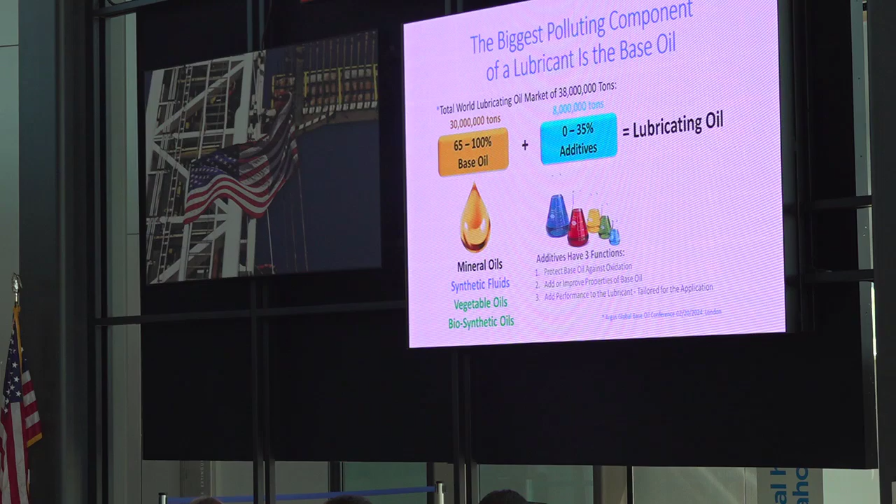Now, if you take a look at a typical hydrocarbon lubricant, the biggest polluter is the base oil, typically 65 to 100%. In the United States, that was 30 million tons of base oil used in lubricants. Then we have about 8 million tons of additives, which are specialized chemicals that may or may not be harmful to the environment - we try to use ones that aren't.

So this comes from the American Petroleum Institute. No, they shouldn't all be in prison. But they group their base oils, the base oils used for lubricants.

The first one is mineral oil, with more than 300 parts per million sulfur and a very low viscosity index. We manufactured almost 3 million tons in America. The next one is a Group 2 mineral oil, and we manufactured almost 4.5 million tons, or 96% of the base oil we produce in the United States was that stuff.

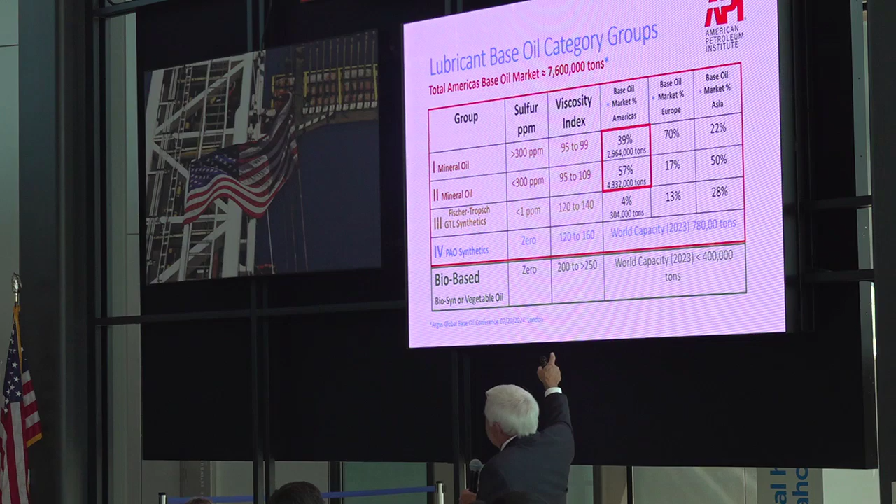You can see over in Asia, they're not producing as much Group 1 nasty mineral oil because they've got newer refineries. We haven't built a refinery in the United States since 1974, and that one was a small one.

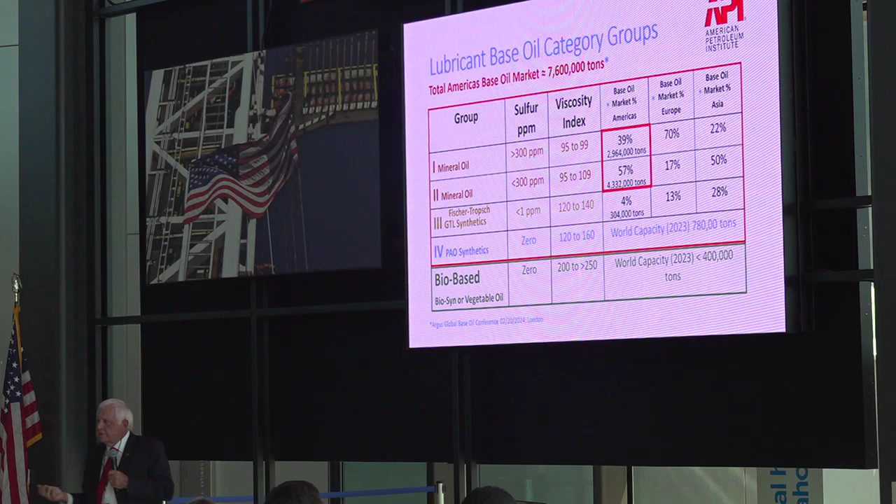Then we have Group 3s and Group 4. This is the Fischer-Tropsch method. It's typically being used right now to take stranded natural gas and turn it into a liquid fuel and liquid lubricating oils. Shell is probably the premier manufacturer of this technology. But it only accounts for about 4% of the market.

This is what we use—typically our highest quality base stock. It's only about 304,000 metric tons.

Then we have PAOs, polyalpha olefins. This is 50-year-old technology, the basis of Mobil 1. Worldwide capacity is only 780,000 tons. So there's not a whole lot of synthetic lubricants out there on the world scale, even in the United States.

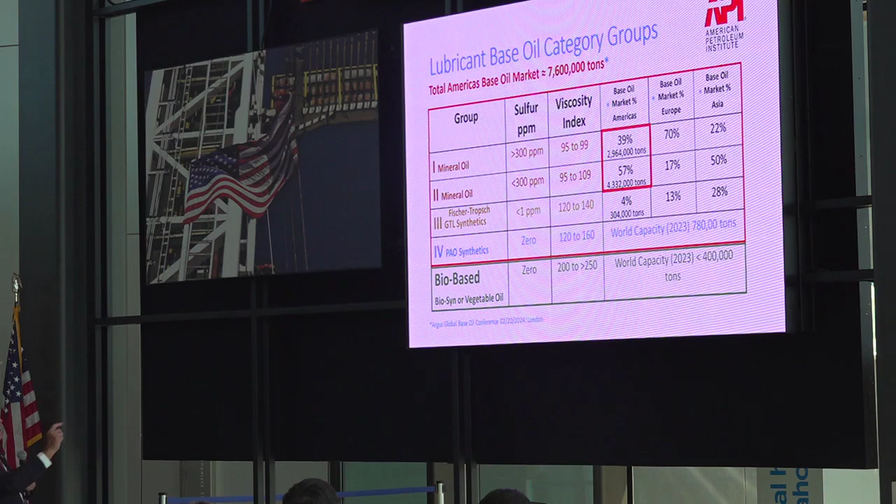And then we have bio-based, which is a biosynthetic that we manipulate from what's vegetable oil—the stuff we eat, cook with, spread on our toast in the morning, called margarine. The world capacity is only about 400,000 metric tons.

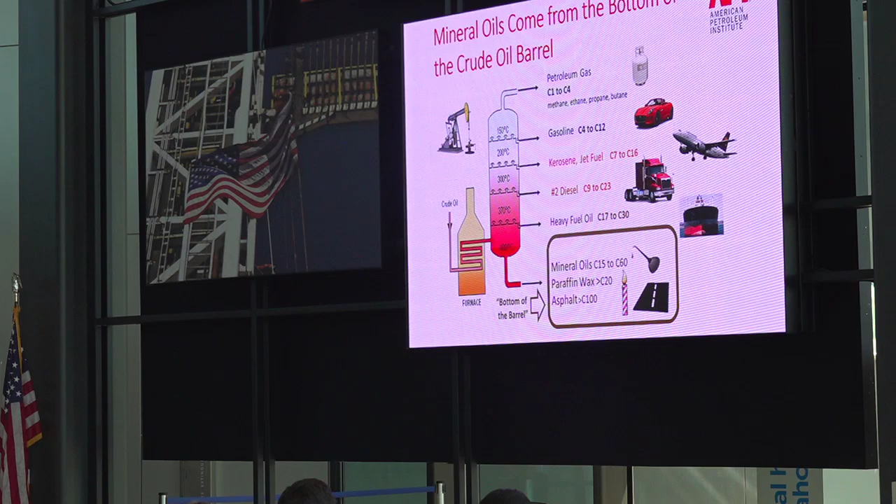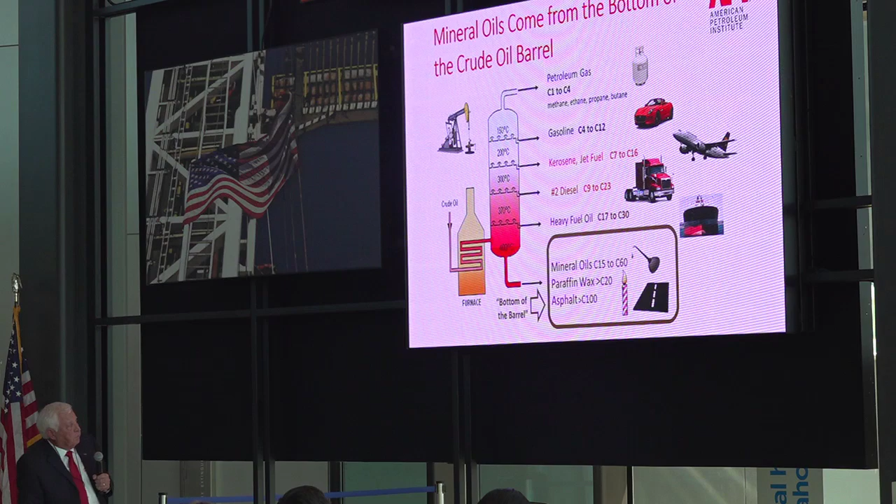So if we take a look at mineral oils, they literally come from the bottom of the barrel. That's the source. And oh, by the way, they come with 2 carcinogens.

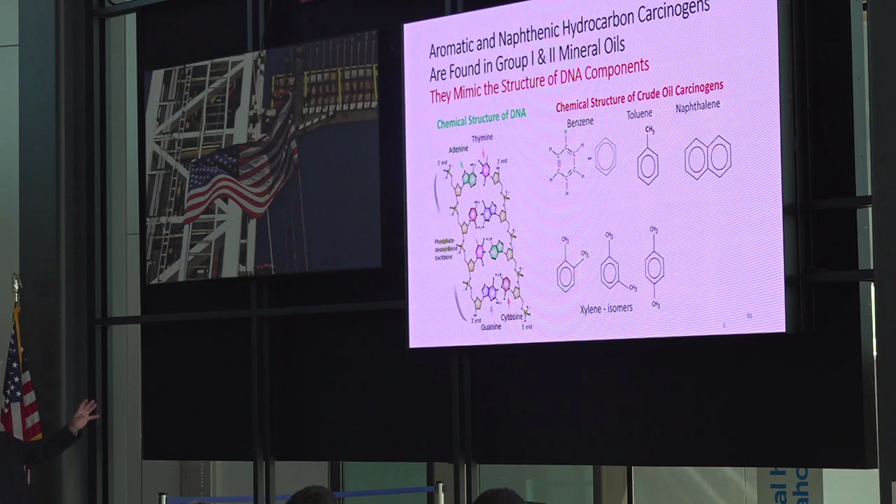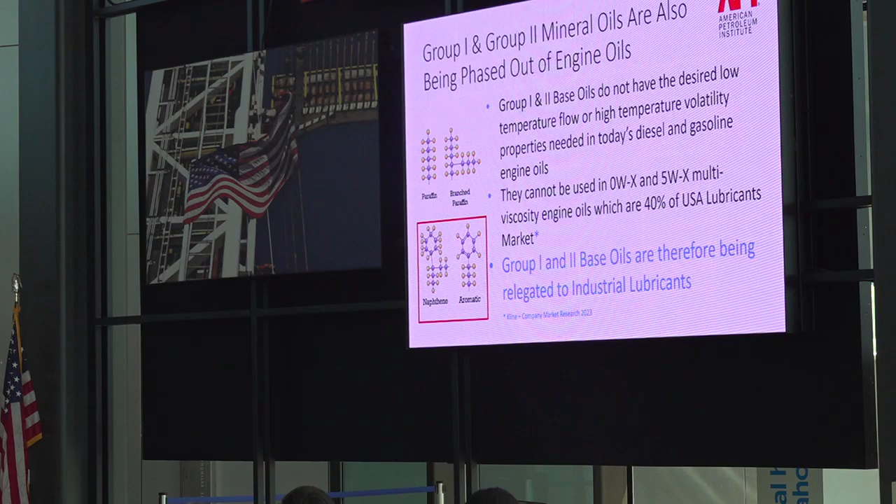These carcinogens literally mimic the structure of your DNA. So if you inhale them, eat them, or absorb them, they do bad things to your DNA and cause cancer. These oils cannot be used in newer cars, which require a 0W or 5W multi-weight motor oil. So all of these nasty mineral oils are going into the industrial sector.

Fischer-Tropsch is really neat technology, about 80 years old. It can turn coal, natural gas, or biomass into synthetic plastics, rubber, synthetic gasoline, diesel, and also a base oil—a branched paraffin base oil designed for lubricants.

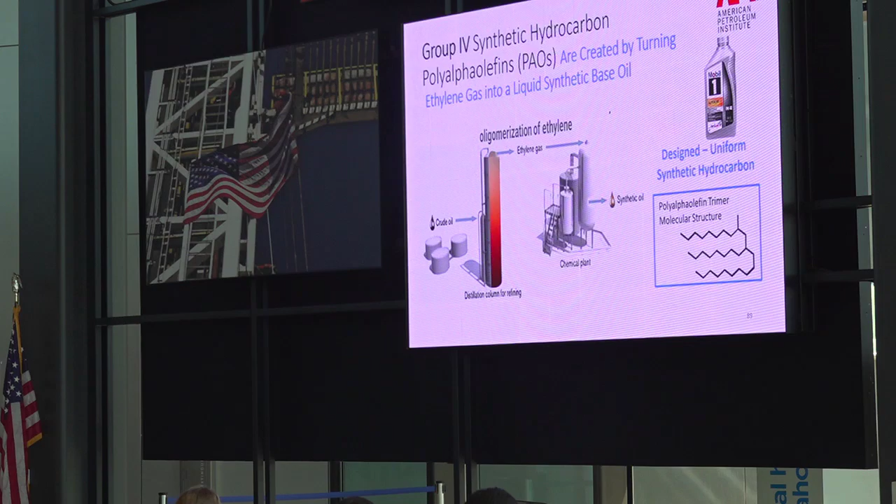This is the Mobil 1 technology. It takes ethylene gas at the top of that distillation tower and turns it into a uniform synthetic hydrocarbon. This is a molecular trimer of that product.

Now, we can take regular vegetable oil, which is not a very good lubricant. I mean, how long does McDonald's keep their oil to fry French fries? Like, they get rid of it every 6 hours? Who's worked at McDonald's? No one?

But now we can take a vegetable oil, put it through a manufacturing process, and turn it into a synthetic vegetable oil molecule that looks just like a synthetic petroleum molecule, which has a lower coefficient of friction. Duh, we've only been working on this for 4,000 years. Maybe we're going to get it right.

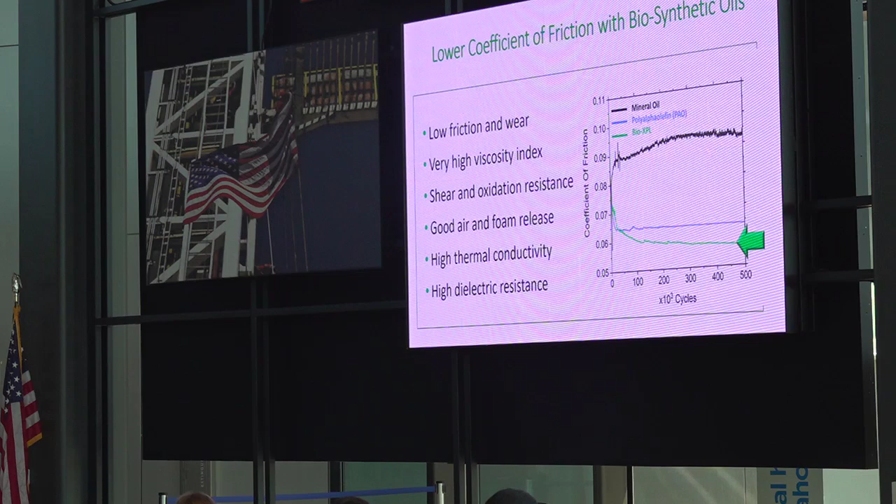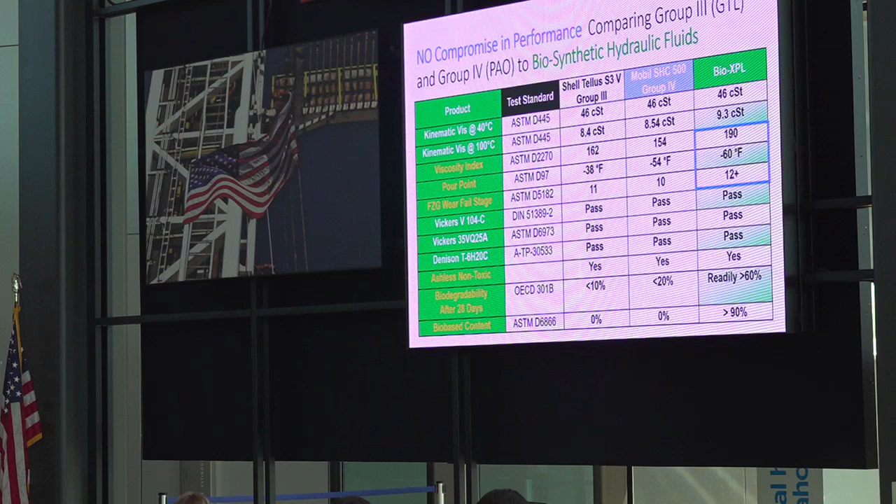Looking at Group 3, Group 4, and this new bio option, we can see we actually have better low temperature properties and better wear properties. So we're going to use it, I hope, everywhere.

But at least we can start here—any environmentally sensitive area or accidental loss. The biggest people interested in this are trash haulers, because when they have a hydraulic leak, it's always in your neighborhood. Actually, Kenny had a trash hauler accident in his lot last year that had to be cleaned up.

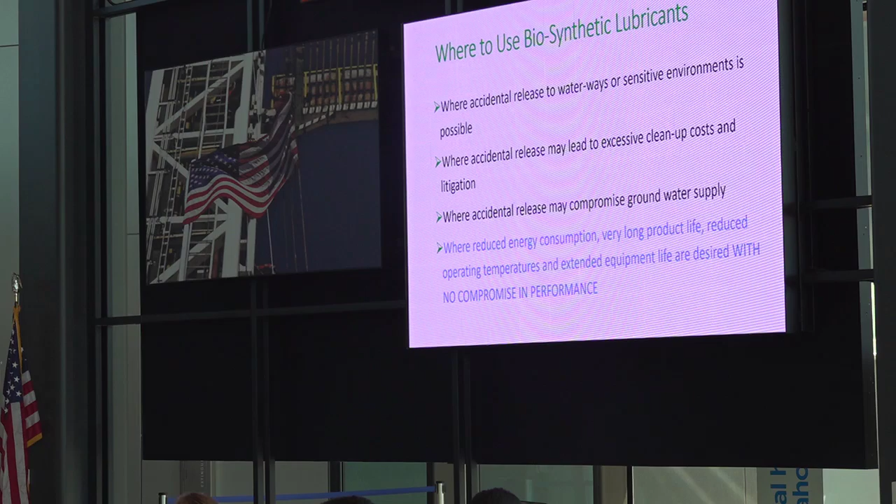And there's no compromise. Any questions? There's a whole lot going on.

We are living in a great opportunity right now. Like I said, we're already done with Generation Z. So now we get to go back to Generation Alpha, and maybe we'll get it right. So there's a whole lot of opportunity out there. Entrepreneurs, they're welcome—you're the backbone of the tinkering culture that we have in this country.

We've only been doing plant surveys for 25 years, where we go in and save some tons of money—going through, getting the engineers to open up the technical library, documenting how they changed it. A gearbox works differently if it's horizontal or at an incline, and how much lubricant to use, things like that. People just don't take that into consideration.